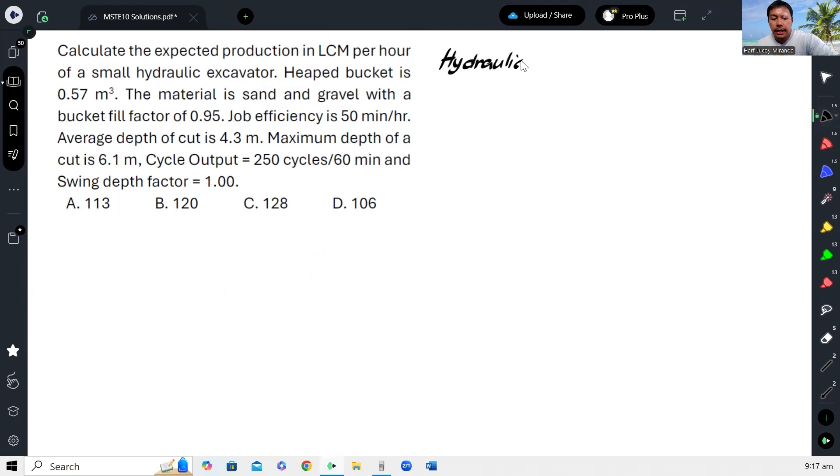This is typically given, the usual hint is the formula. The production in loose cubic meter per hour is equal to - you'll see this in past board exams - C times S times V times B times E. So this E is what we call the job efficiency.

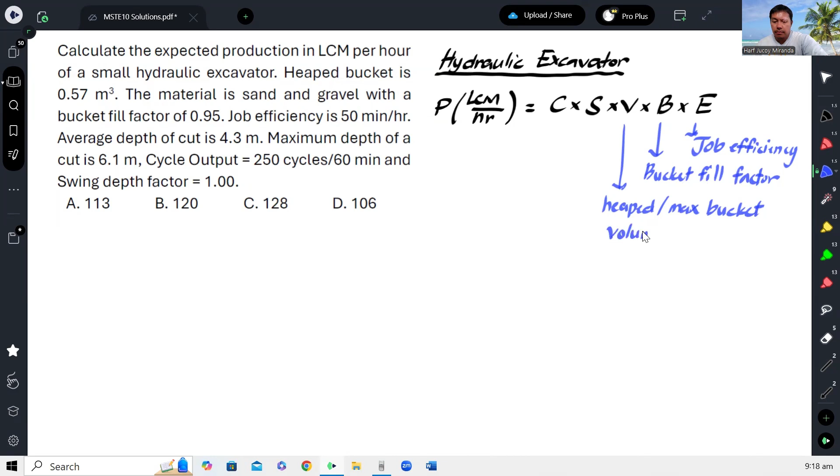B is the bucket fill factor. And V is the heaped or maximum bucket volume. And usually this is in loose cubic meter per cycle.

S is the swing depth factor. And then C is the cycle per hour. That is the meaning of the formula.

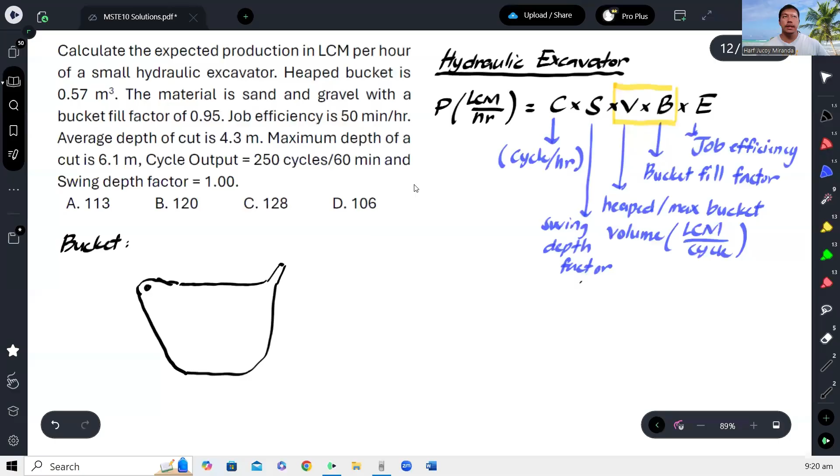So if this is the excavator, there. So what I mean is, this is the bucket.

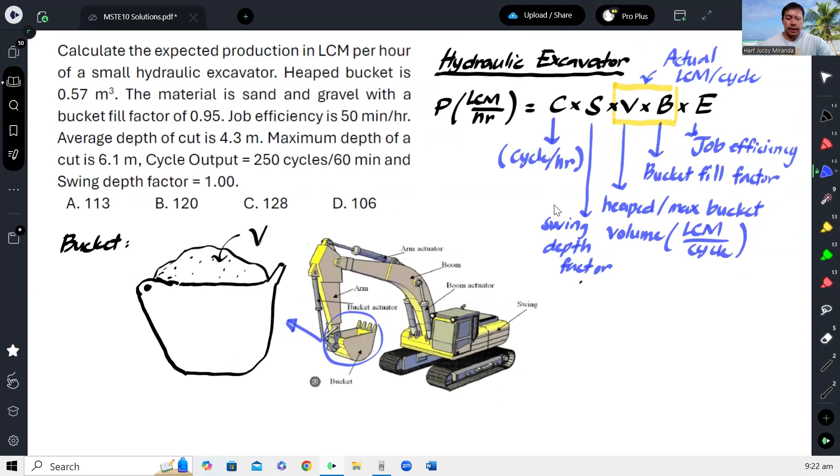So that product is just the maximum capacity multiplied by the percentage that fills it on average. So I can say that this highlighted part is the actual loose cubic meter per cycle. Then you multiply by efficiency, multiply by cycle per hour, and then the swing depth factor. That's the idea for hydraulic excavator.

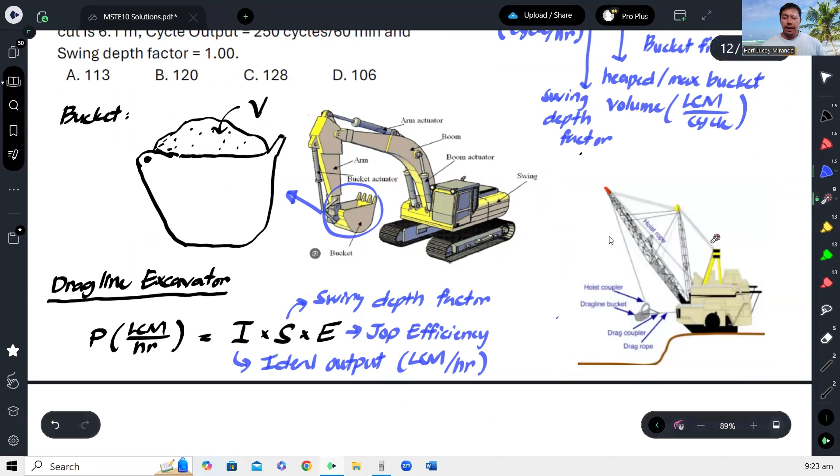If you look closely at the formula, when you multiply V times B times C, the units become cycle per hour, and this one is loose cubic meter per cycle. So the cycle units cancel out, leaving loose cubic meter per hour. So actually this CVB is also the ideal output, the ideal output for a hydraulic excavator.

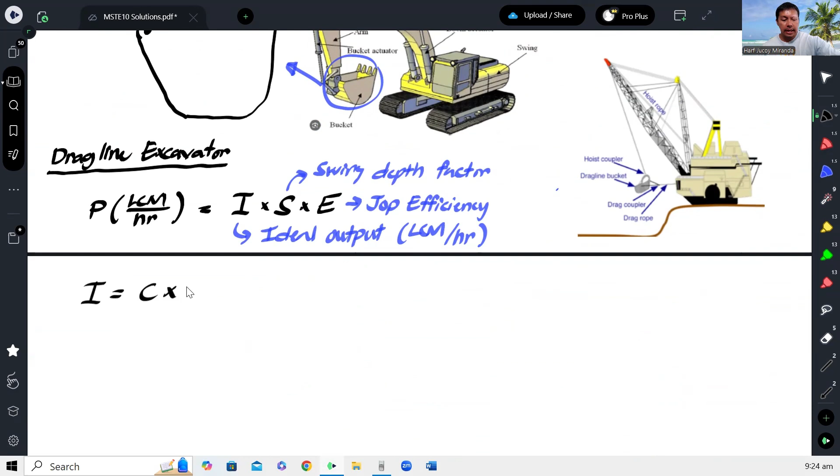Okay, so ideal output can be equal to C times V times B. So, they're basically the same. It's just that there are instances where this ideal output is given directly, especially when the machinery is a dragline excavator.

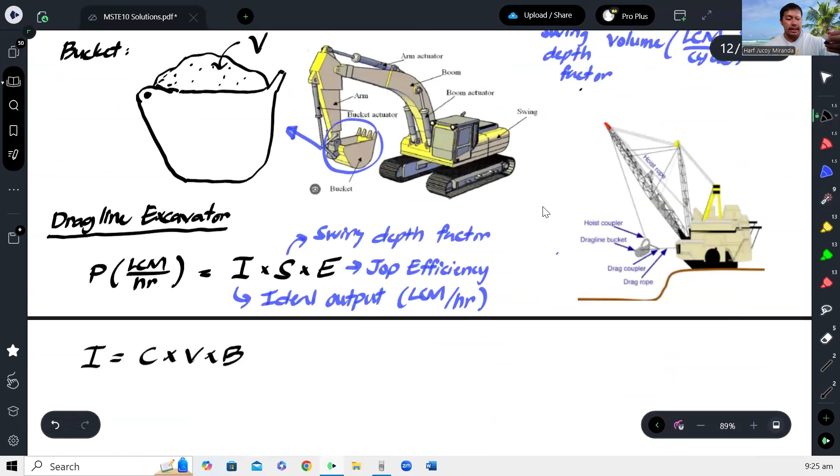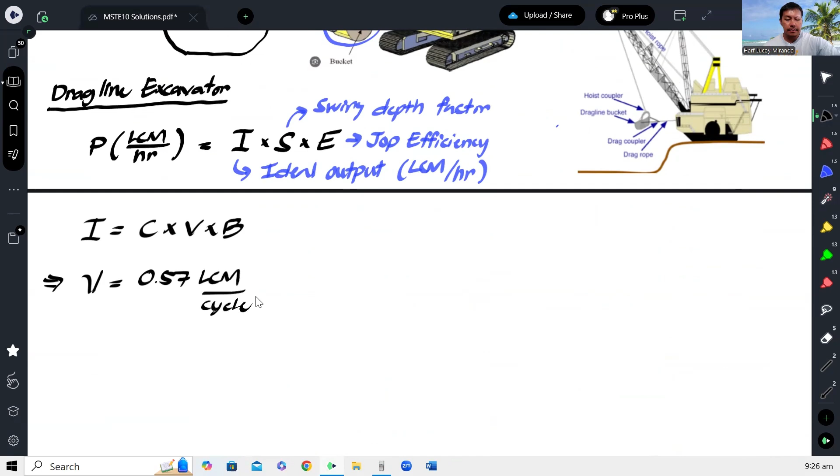So for this item, our V is 0.57 loose cubic meter per cycle. Right? What other given do we have?

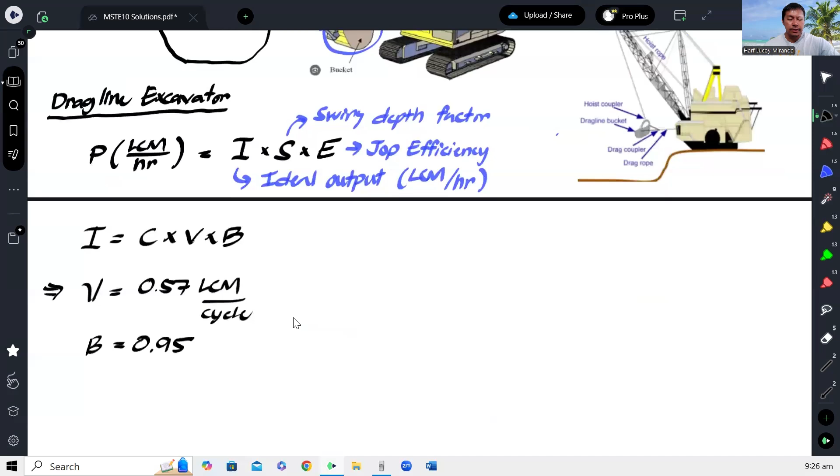Our bucket fill factor, that's our B, is 0.95, meaning it's only about 95% full on average. Job efficiency, that's the E.

So, 50 minutes per hour. When we say efficiency, it's normally a percentage, right, or decimal. So actually you can convert it.

It turns out that for every 1 hour, only 50 minutes is actually the working time of the machinery, accounting for other time losses - maybe the operator stopped briefly, or the excavator lagged a bit. So considering all that, on average only 50 minutes per hour is actually productive for the machinery. So you can convert this as 50 minutes per 60 minutes, since 1 hour is 60 minutes. Therefore, the efficiency can be written as 5/6.

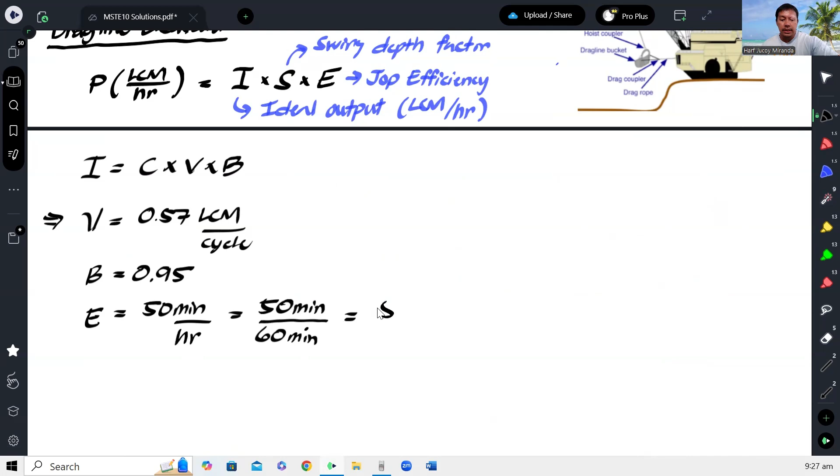Okay, what else? Average depth of cut - that's not included in our formula, so we will neglect that. Maximum depth of cut is 6.1 - again, we don't have that in our formula, so production doesn't depend on those directly.

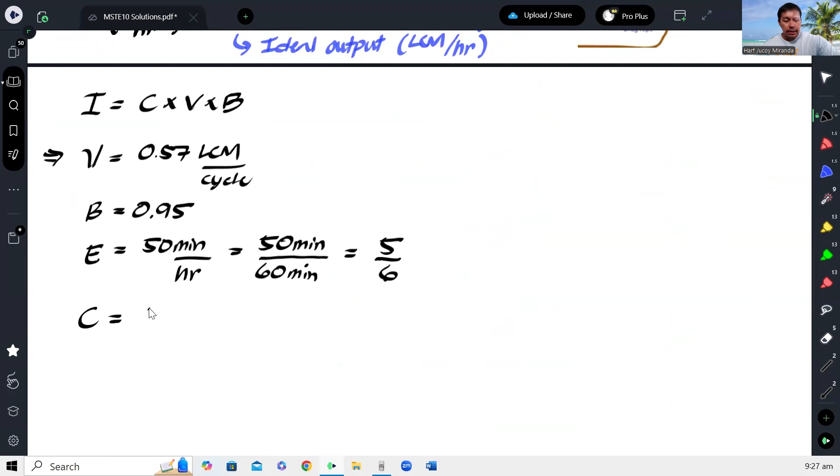And then cycle output - so this is our C, 250 cycles per hour. And then swing depth factor, that's your S, is 1.

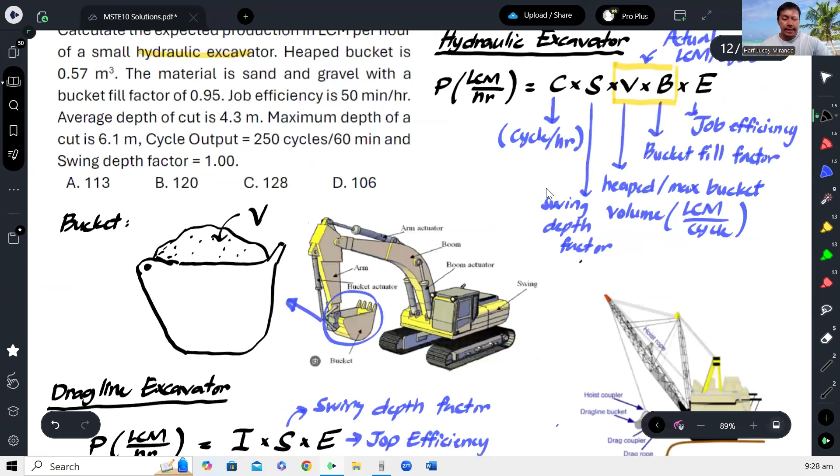Okay, so applying the formula for the production, we have C, S, V, bucket fill factor, then efficiency - CSVBE. And when you set the units, they cancel out, leaving units of loose cubic meter per hour.

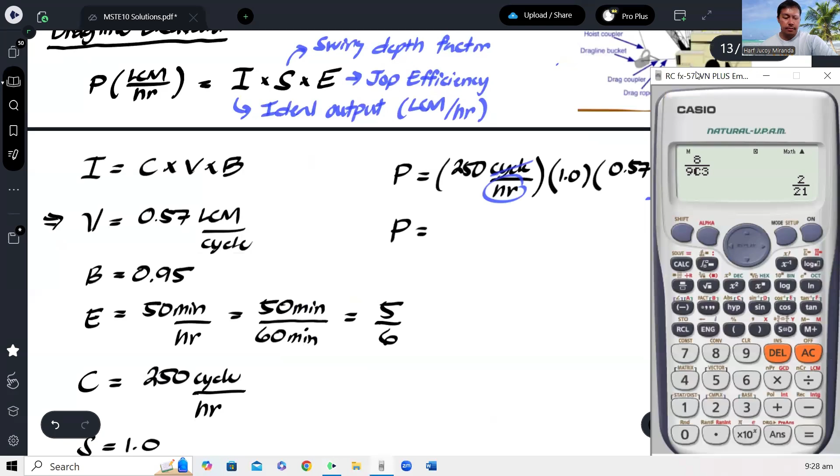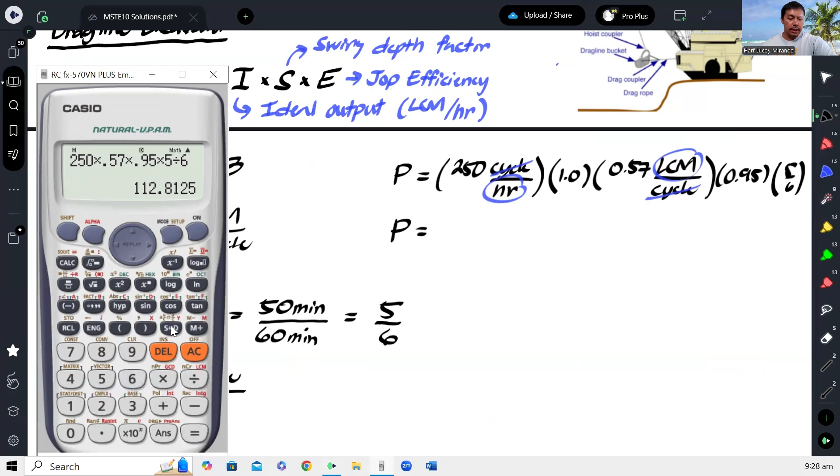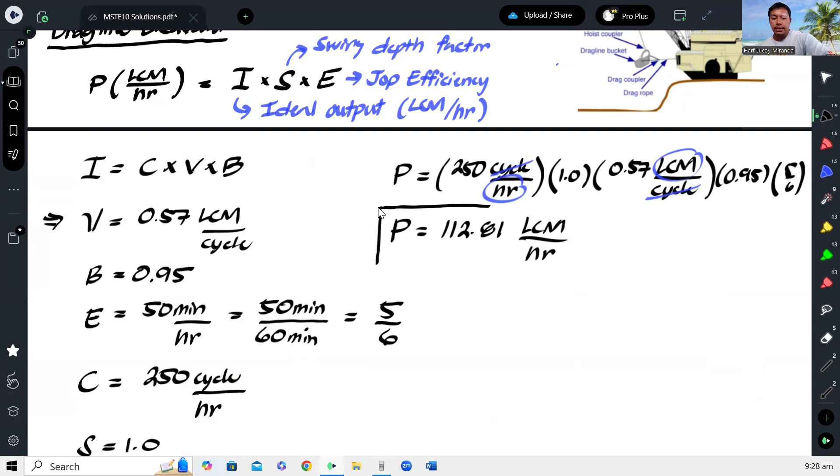So the production would be 250 times 1 times 0.57 times 0.95 times 5/6, and that gives us 112.81 loose cubic meter per hour, or approximately 113 loose cubic meter per hour, and that would be our answer.

Right? So that's how you solve this problem.